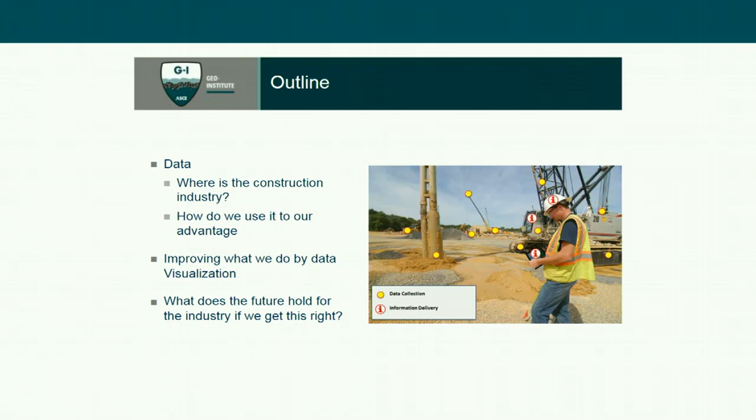What kind of new things are we doing with data visualization? And then, what does it all mean? Hopefully, at the end, if we collect data and use it the right way, what does the future hold for us? Does it help with AI initiatives? Does it help with making better innovations? Certainly we hope it reduces the cost of what we're trying to build, which leads me into the next slide.

If we look at the construction industry as a whole and how it has improved over time, there's some pretty interesting data that McKinsey Global Institute has put together for us. If you don't know who McKinsey is, they're a consulting firm that's been in the news a bit lately, but it's a pretty interesting firm focused on innovation and improving business. Over the course of several years, from the mid-90s until recently, around 2014-2015, they looked at improvement in the construction industry versus total economies from around the world, and certainly compared that to manufacturing.

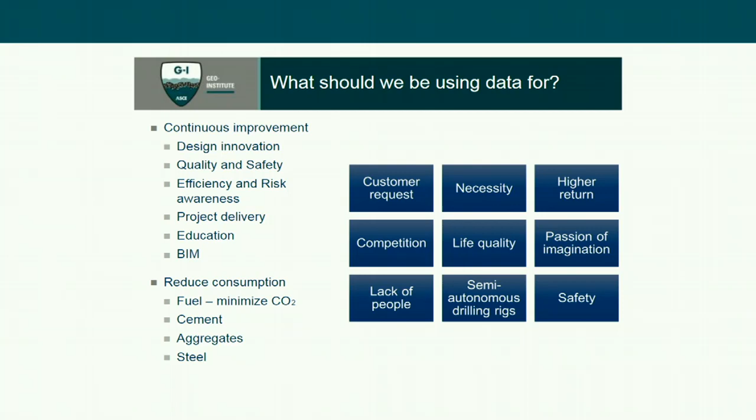Well, what's really driving some of the use of data? It could be customers are requesting it. It's a necessity. We're trying to improve our life quality. There's many different reasons why we could be driving ourselves to use this data in a much different way.

If we think about why we need to collect data and how we collect it, one of the things we do currently is use data from soil borings. That's the first thing we look at from a geotechnical perspective. We go out and take a couple of borings at a site, but we're not able to take borings at enough frequency to really paint a complete picture of the underground risk we're looking at.

So we need to use data coupled with borings to really evaluate and help us understand the assumptions made at the design level. We can use data collection along with some of the borings taken to assess changes in site conditions, allowing us to react faster to these changes. We've got to make sure specifications on our projects allow us to do that. We also use data to look at performance of the design.

So are the measurements we're seeing as we're building, say, a ground improvement solution or support of excavation—do the measurements collected from the systems we have in place really make sense with what our design assumptions were? We can couple those with observations and really make a complete picture of what's going on from a design perspective.

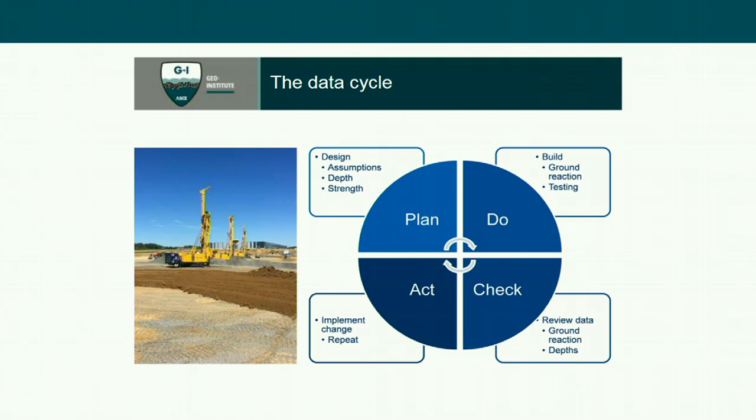That takes us into the next step, which is the Act. The Act phase of the data cycle allows us, after the review of the data has taken place, to implement change moving forward. If we think about our construction sites in this manner, it allows us to move forward with a complete picture of data and how we manage that.

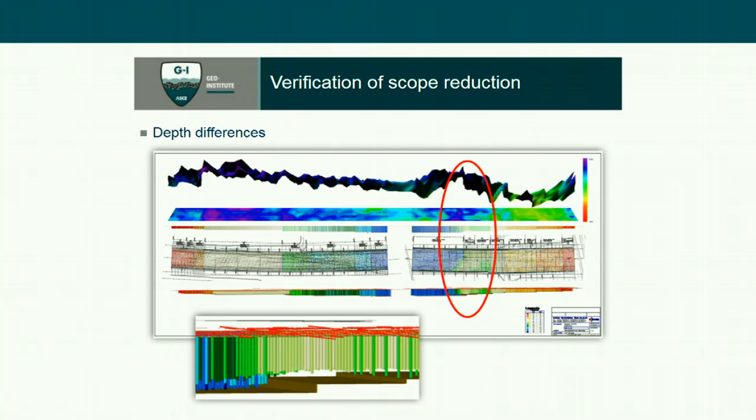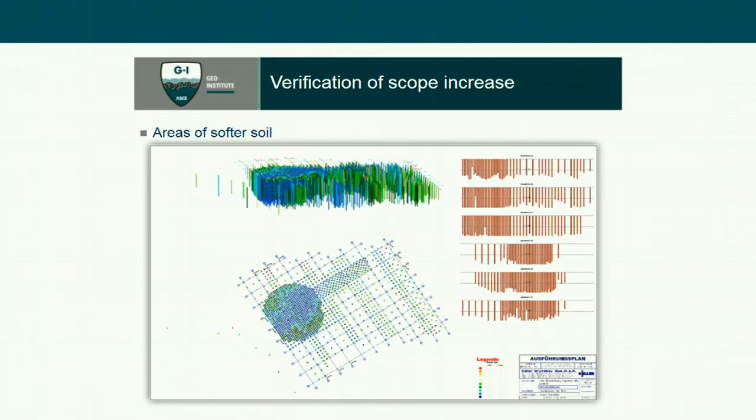Okay, so this is a scope reduction. The next way that data can be used is for verification of scope increase. This is the positive side of what contractors are in the business for, moving ahead that way.

Thank you, Dan. Go ahead. Yeah, I think we're going to leave, maybe come back, see if we can answer some questions later, because I want to make sure that we have enough time for everybody.

So today we'll be talking about ways to mitigate shallow slope stability using plate pile ground improvement systems. And we'll progress through the slides.

When you're an engineer or an asset manager facing a slide repair, that's usually an unexpected cost - something we don't plan for and certainly don't like to deal with. As we consider choices to repair those, they depend on many things: how much it's going to disturb current operations, such as in the case of a highway embankment; what the long-term maintenance looks like; whether we're fixing it for a short period just to restore serviceability, or whether we want a long-term fix we don't have to worry about. Part of that is the design cost, and how much that's going to affect the overall budget for future assets an asset manager might have to deal with.

It's always pretty inexpensive and easy to push the soil back uphill when you experience a shallow slide, and it's usually cheap to do that the first time.

So we'll talk a little this afternoon about SRT systems, or plate pile systems. They can provide engineers with a final or engineered solution, and the design slide shows a couple of small diagrams of how this works. We're basically dividing the failed and sliding soil mass into smaller increments, and designing the plate pile itself to be strong enough to support the movement of that smaller increment as it tries to move downhill.

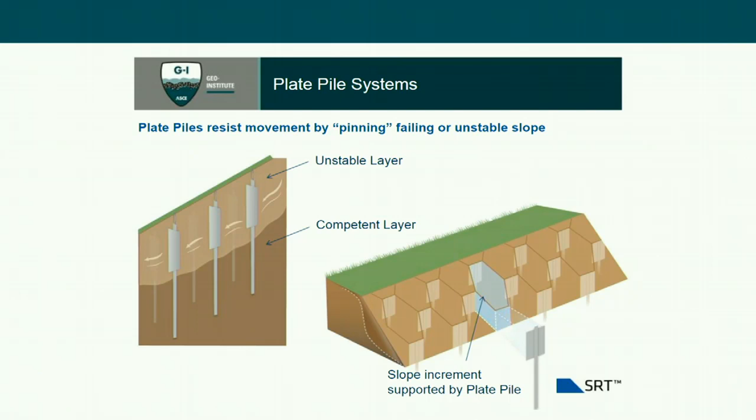And the transverse spacing is usually going to be a function of the analysis. We have some slides later on to get into a little more detail about that.

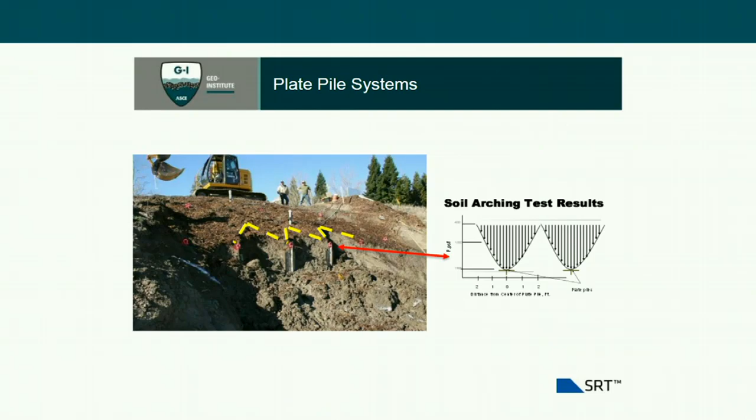Just some pictures of what plate pile looks like. These are typically regular steel, black steel, that can be easily moved with an excavator and one guy on the ground. Not too heavy, and you can see that these are S-shapes generally.

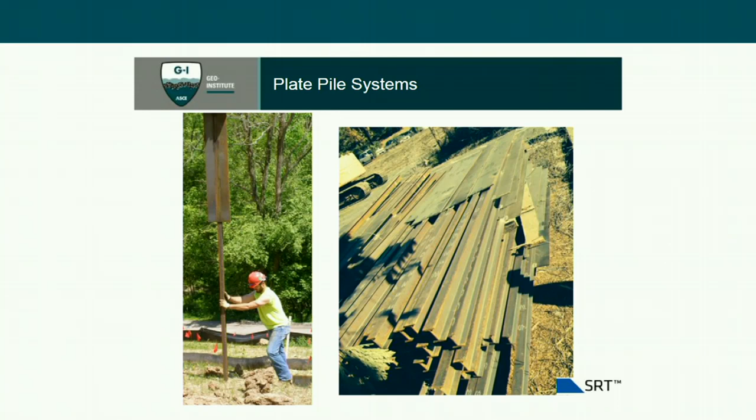Galvanized steel or black steel can be used if you have a highly corrosive situation. You could oversize the steel of the plate piles. It's no problem—usually add an eighth of an inch or so for corrosive steel. Normally that is basically done in accordance with FHWA requirements for steel embedded into soil.

The piles themselves can be S-shapes or they can be angles. The industry has kind of gone more towards using an S-shape. It's easily available and comes in standard sizes. Usually 40-foot lengths of pile can be cut easily into 5, 7, 13, or 10-foot sections.

The S-shapes are pretty usable, and the lengths can vary depending on the design need, anywhere from as shallow as 6 feet to as deep as about 16 feet. It's important to note that the plates themselves are going to be about 12 inches wide, and the lengths of the plates will vary as a function of the failing mass, as the depth of that failing mass.

But the welds that are used to hold them on are not structural, they're not needed to be structural. They're just used to keep that plate on the pile as it's being driven into the ground.

General guidelines for the suitability of plate pile systems or SRT systems: anything from pretty flat to pretty steep. 1-to-1 is about as steep as most applications fall into, and really most applications fall within a 3-to-1 or a 1-to-1 slope. In Texas, there are many slopes much flatter than that still moving quite a bit, so they could be as flat as 7-to-1 or 8-to-1.

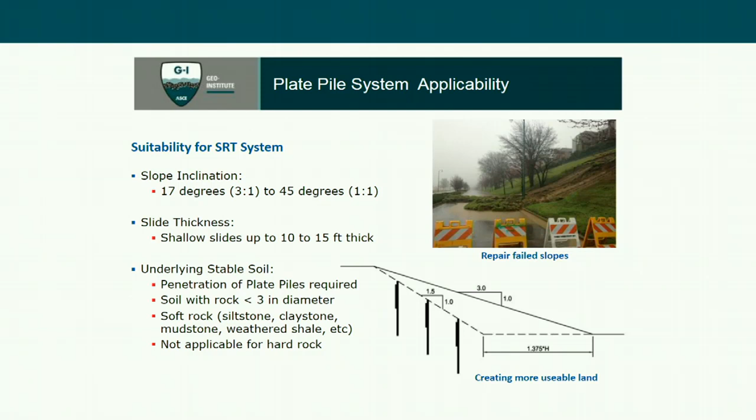Fast using normal excavation equipment—just a normal 315 or 312 size Caterpillar excavator—and they can be installed using either a hydraulic hammer, as shown in this video, or a vibratory hammer, similar to one that might be used to install sheet pile.

There are a couple different ways to deliver plate pile systems to customers, and we'll talk about 2 of them here. One is for pretty basic projects. These can be done directly to the contractor, and they have chart solutions that make things quick to respond to. They can usually be installed by an on-site contractor, or perhaps a DOT or public works maintenance crew. Normally this is an emergency response type application where the slide has occurred as a surprise and it has some impact on part of infrastructure.

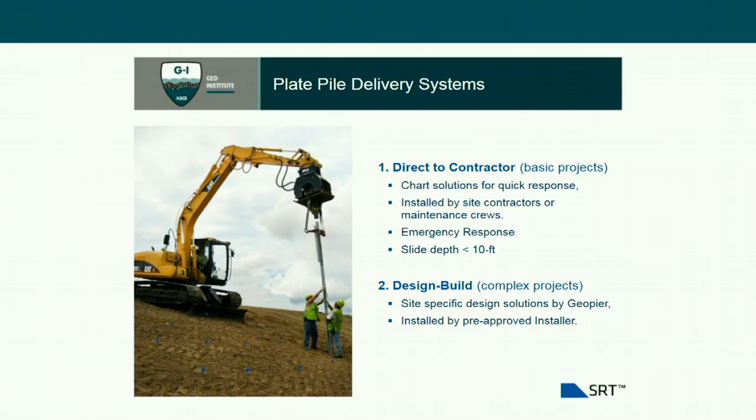Usually you want to deal with shallower slides, about 10 feet or shallower. Then, of course, if there's a more complex slide with a steeper slope perhaps, or more critical infrastructure or property upslope or downslope of it, a site-specific design solution can be provided. This is usually installed in a design-build manner, so you'd want to work with a pre-approved installer who has experience installing plate pile systems on past projects.

Let's talk a little bit about how basic projects can be provided. Detailed engineering analysis are clearly always preferred, but oftentimes these slides are impacting public infrastructure. It might be impacting an industrial asset like a pipeline or transmission line, or it could be putting commercial property in some imminent danger. So you need a quick solution that allows field crews to mobilize and begin repairs of this slide. To accommodate this, plate pile designers can use predetermined solutions based on typical inputs from basic soil mechanics information.

These will provide the designer with predetermined spacings, and they'll be conservative, based on 4 primary inputs: the slope inclination, how steep or flat the slope is; how deep the slide is; what type of soil we're installing in, whether it's soft, firm, or hard; and what the required factor of safety is.

In this manner, normally the designer would need to have project information provided by the customer, the person who has ownership of that slide, and then the designer would turn the solution and specifications back over to that owner to be installed by a contractor of his choosing.

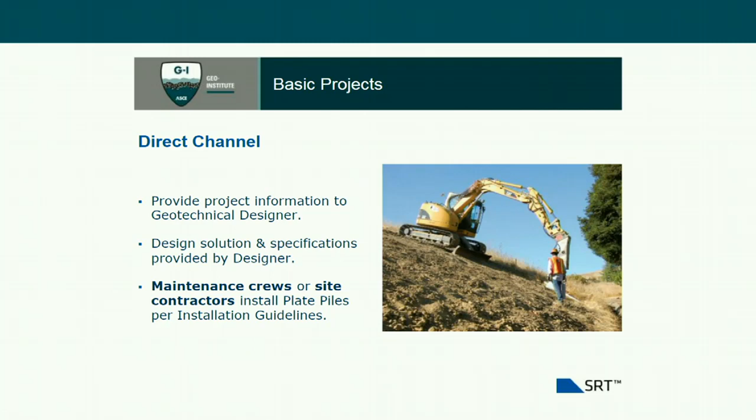For complex projects, more analysis is required, and I'll go over in just a few slides the basics of how the design analysis is undertaken. The first step is, with the knowledge of what we believe the depth of slide is, we can go into an LPILE input by choosing a plate pile length. For this particular example, we chose a 10-foot plate pile just for the purposes of looking at it, with a sliding depth of about 7.5 feet.

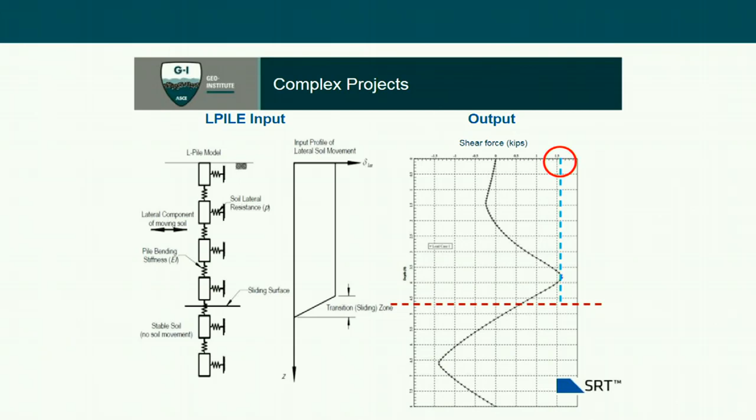So you model that plate pile in a traditional LPILE analysis, and as you're applying load to it, you want to pre-select a deflection of about 1 inch, to see how much stress that plate pile can develop at that lateral deflection. For this example, with that 7.5 foot deep slide and a 10-foot S-shaped pile, we developed a shear resistance of about 1.5 kips.

So we know that for this particular application, the shearing capacity for the plate pile is about 1.5 kips. You go back into your slide analysis program and, using the composite shearing now provided by the plate piles, combine the back-calculated phi and C information from the failed condition, inserting the appropriate number of rows to the appropriate depth in a composite manner to develop the slope stability solution with the proper factor of safety.

The required factor of safety can change—sometimes it's 1.5, it can be as low as 1.2 or 1.3. That dictates the number of rows and how far up and down the slope you have to go. It's common for some of these repairs to provide owners with options of factor of safety to see which one fits their budget better.

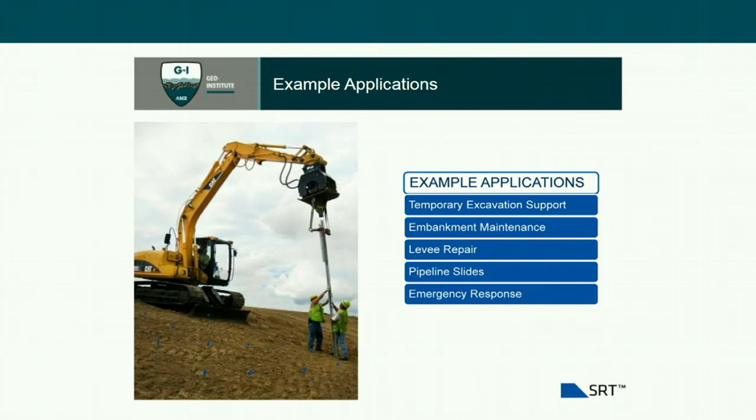This slide shows a bunch of different examples of applications for plate pile use. Due to time restrictions today, we're going to talk about 2. We'll look specifically at embankment maintenance and pipeline slides, although any of those 5 categories would be good applications for plate pile systems.

The failed mass was not impacting traffic, luckily, at this time, but it was feared that further movements would cause that to be a problem.

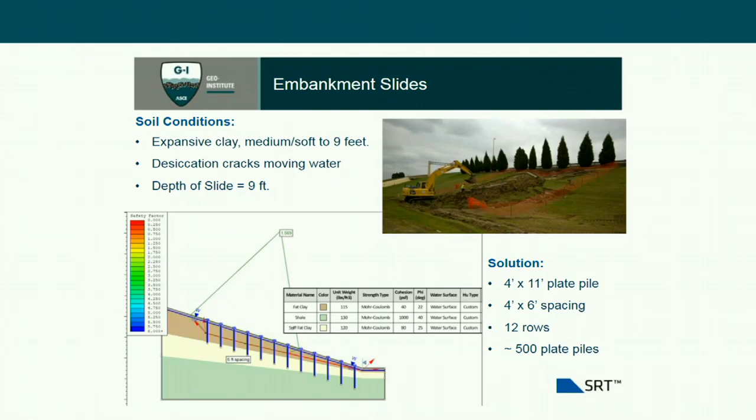The solution developed was plate piles with a 4-foot plate and an 11-foot pile, spaced 4 foot parallel to the slope and 6 foot up and down the slope, needing about 12 rows. About 500 plate piles were installed to repair this slide.

When it was done, it looked nice and natural, as if nothing had ever happened. Those 500 plate piles took about 2 weeks to install with no disruption to traffic. You can see from the pictures they were able to work on the slope.

When they were done, the natural finish chosen was just some sod that was placed down and staked in place after the plate piles were installed as per plan. Because the plate piles are embedded about 12 inches below final grade, there's nothing that would impede a mower or any type of maintenance equipment from doing everything it needed to do before the slide had occurred.

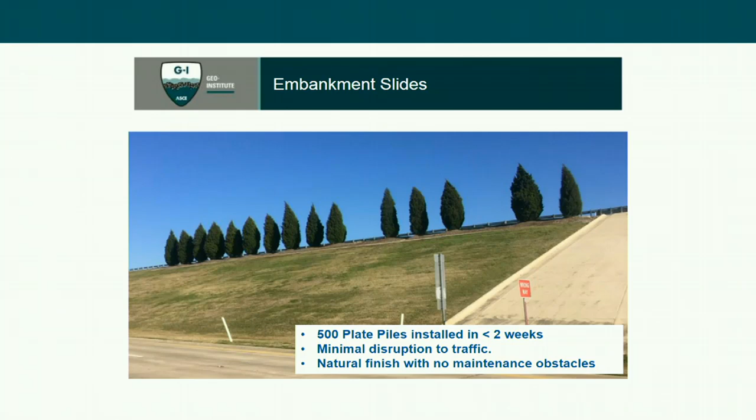Next example we'll look at would be a pipeline slide that happened in northeast Kentucky. If anyone is in that area, you know there's a lot of pipelines in the midstream industry coming through there.

They had to excavate soils around the pipeline, make necessary realignment of the pipe, and then replace the backfill. But due to the emergency response nature of the repair, they had to put that in pretty quick and didn't compact it the way they wanted to, so they needed a final repair.

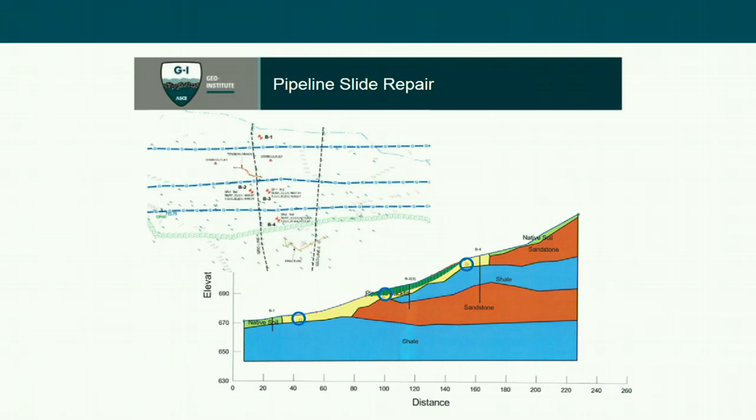So the initial repairs were made, but they needed a final repair so that this wouldn't continue to happen and continue to impact these pipelines.

It was determined that this slide depth repair was to be about 5.5 feet, and due to the length of this repair area downslope, they needed 19 rows. This one was a little more severe.

Even though it was just a 3-to-1 slope, they still needed the plate piles to be installed on 4 to 4.5 foot centers with 10-foot piles and 4-foot long plates.

Overall, there was about 1,500 plate piles required for this project, completed in about 25 days. They got a period of pretty good weather, and because it was a 3-to-1 slope, the installation equipment was able to access this work area with conventional equipment.

Matt, you need to wrap it up. We are running out of time.

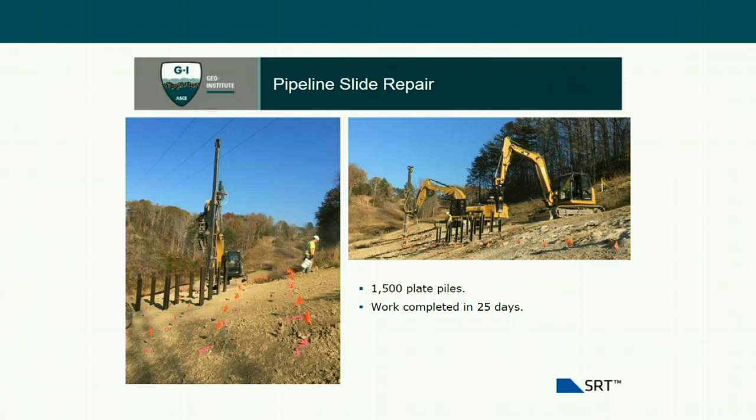Yeah, so with that job went well, a little bit of pre-drilling was required. So right on time, Jose. Just finish with a few

Parting thoughts on plate pile systems: they're fast and economical. They can be used very quickly for emergency repairs due to the simplicity of the design. Most of the pictures did show conventional excavation equipment, things that most public works and DOTs have easy access to. And from an engineering standpoint, they do represent a final and robust repair for recurring slides.

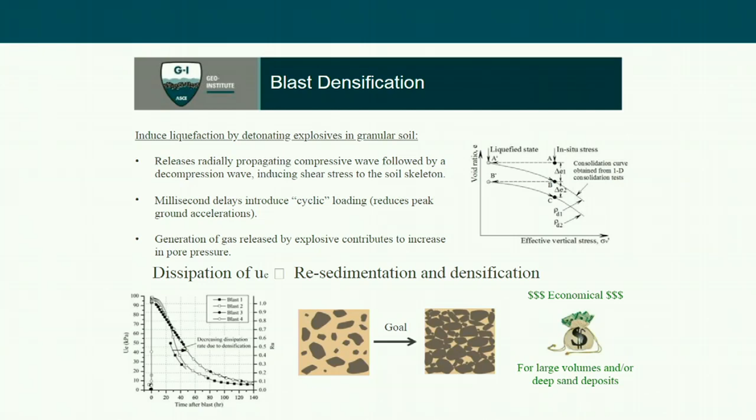How do we verify improvement? The most common method is to survey the area that was treated, and we do this by measuring surface settlements. We note quickly here that this is not a direct measurement of densification necessarily in the target layer, but if we have surface settlement, then we know something is being densified.

We could also attempt to obtain direct measurements of densification through something like Sondex tubes, where we're actually measuring vertical deformations at depth. And then thirdly, the other more common approach to verify ground improvement is to measure some sort of change in penetration resistance, usually with the cone penetration test or standard penetration test. The intuition being that if we've densified the soil, we'll have an increase in penetration resistance.

And while this is sometimes the case, we often observe either no increase in penetration resistance and in some cases a decrease in penetration resistance. In certain cases, this is followed by an increase in penetration resistance with time. And what we're trying to do is really understand or reconcile these observations.

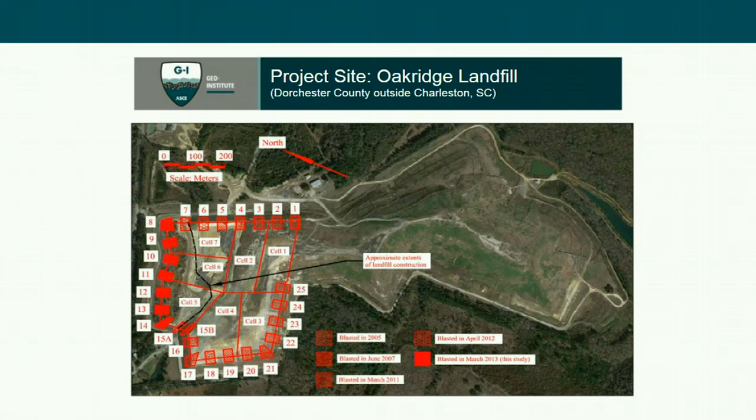There was also a thin layer known as the Pringletown beds of silt overlying that loose layer of black sand. Also note that in this particular case, we had what we call 4 coverage, or 4 blast events, that took place.

What we did as far as instrumentation was survey the area before and after each blast. We performed pre- and post-blast CPTs, and we also measured pore water pressures at 10 different locations, both inside and outside the zone and at several depths.

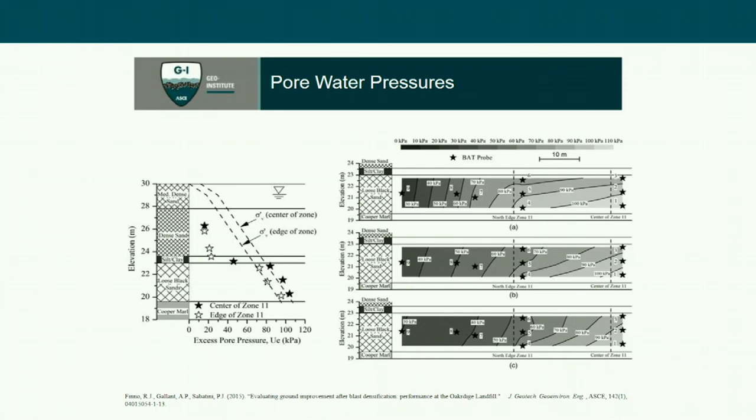One question that might arise is, was the densification occurring within the loose layer itself? Again, we saw that we only liquefied that layer. Secondly, CPT results also show an approximately half-meter drop in these 2 layers, the overlying Waccamaw formation and then the black sand below. That helps verify that densification was only occurring within that black sand, and that corresponds well with the surface settlements we observed as well.

So we're fairly convinced that, yes, densification was happening in that area.

So really what we want to know is, what kind of increase in penetration resistance might we expect? We had an estimation of relative density before the blast, anywhere from say 20 to 30%, and then relative density increasing based on those surface settlements to as much as 80+% at the center of the zone. So we may expect, based on the stress levels at that depth, a tip resistance upwards of 15 to 20 MPa. But as you might expect, given this talk, we did not observe any increase in penetration resistance.

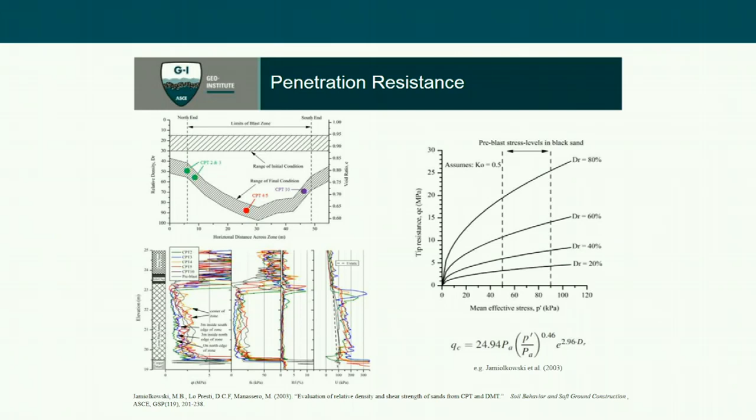Another interesting thing to note here is that we also noticed an increase in the pore water pressures. If you look at the CPT results, I'm showing the pore water pressures measured at the base of the cone, and they actually increased from pre-blast levels. That was an interesting result, and I'll try and get to that here in a second.

So one of the first things we wanted to do was try to explain why we're not getting an increase in penetration resistance, so we looked at the stresses using a finite element analysis.

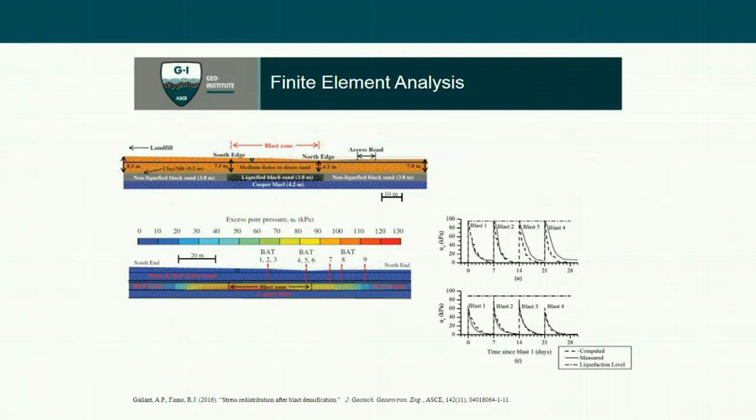Predicting excess pore water pressures generated during a blast in a finite element framework is extremely complex. Fortunately, we had detailed pore water pressure measurements, so we could input these as the driving force as they dissipated. On the right, I'm showing the computed and measured dissipation of excess pore water pressures before and after each blast at a couple of locations.

The second thing we considered was our choice of constitutive model to simulate the soil. We went with the sand hypoplasticity model, a critical state model with barotropy and pycnotropy terms—fancy ways of saying pressure and density dependence, as is the case for soil. We wanted to capture the behavior at several densities, and as shown with these triaxial tests, we show the stress-strain response for relative densities of about 20 to 80%, capturing that behavior reasonably well with this one model.

The second thing we needed to do, a limitation of elastoplastic models, is capture the resedimentation process—in other words, erase the stress history. With the basic sand hypoplasticity model, BSH, we can do this. In the bottom right figure, we wanted to resediment in virgin compression, but outside the zone where we didn't observe settlement and didn't erase the stress history or liquefy it, we wanted to recompress with a denser state, or lower compressibility, using the extended sand hypoplasticity model. That's how we captured both behaviors.

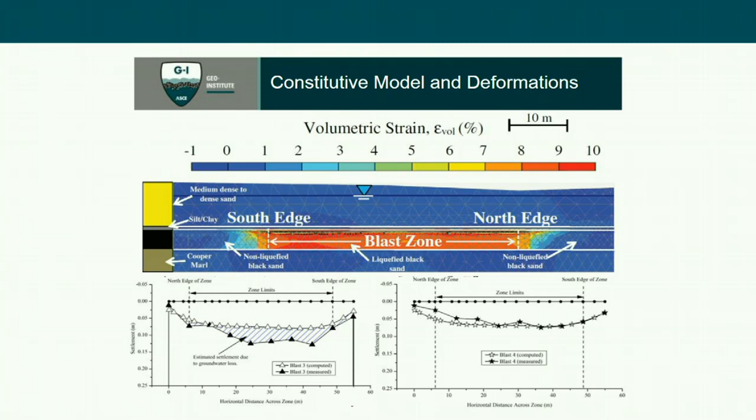So that's where we started to ask ourselves, what's going on with the gas released during detonation of the explosives? One of the instruments we had out there to measure pore water pressures, the BAT probe, acts as both a piezometer and also has the ability to sample pore fluid—I say pore fluid because it samples pore water, but also any potential free gas that may exist.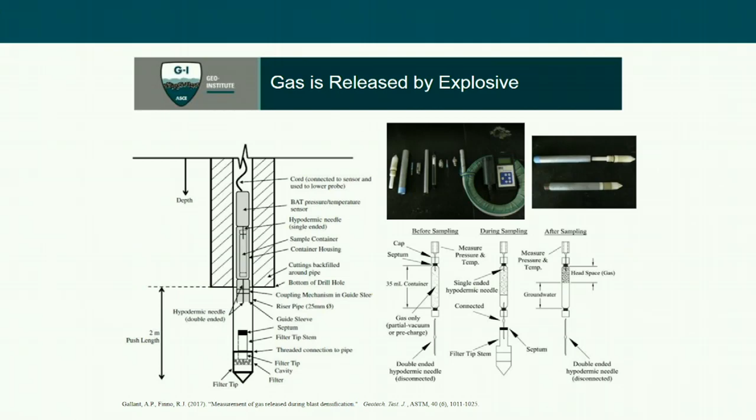I won't go into this in detail, but what we're able to do is capture the pore water, and with the gas in the headspace, quantify the amount of gas that was in situ. That's important for us to understand—we wanted to know if there was any free gas in the soil matrix that may be contributing to the post-blast penetration resistance.

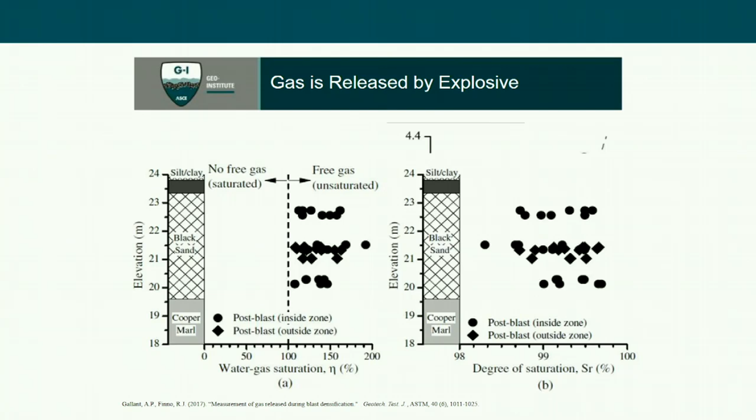On top of that, we wanted to determine, based on the amount of gas we have, whether we saturated the groundwater with gas - in other words, whether we cannot dissolve any more gas, so we'd expect free gas. The answer was yes. On the left here we have water gas saturation, which we call eta, and when that's above 100%, we say we have free gas. Based on the amount of free gas, we're not trying to say we captured all the free gas in the area, since some may have been trapped in the voids, giving degrees of saturation less than 100%, though they may have been lower than what's indicated here.

Let me finish up quickly with a look at the pore water pressures we typically expect around the cone. With coarse sand, we typically do not expect any excess pore water pressure. But in fine sands, we do expect some excess pore water pressure around the tip and then at the shoulder, as we observed in pre-blast as well.

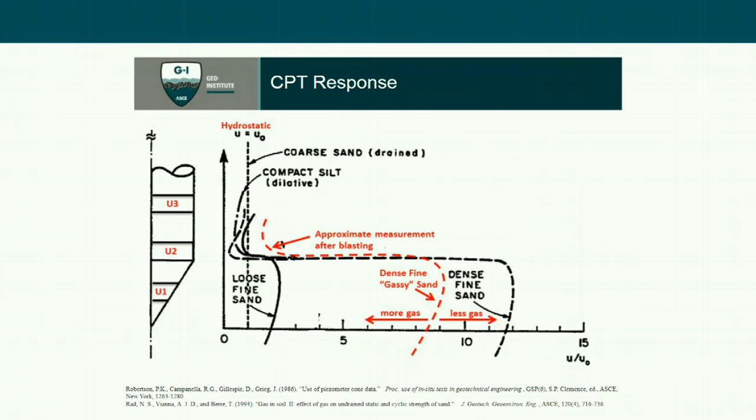When we have gas in the soil, that will increase the compressibility, or decrease the bulk stiffness, of the material ahead of the cone. That increased compressibility could contribute to the decreased penetration resistance we observe after blasting. Additionally, as that cone passes, we induce very large shear strains around the base, and in a dense material we'd expect negative excess pore water pressures. But in a gassy, dense material, you'll lose that negative excess pore water pressure that typically develops. So what I'm showing here is the difference in shear strength between dense saturated sand and dense gassy sand during shear - you get a much lower shear strength because you're not developing those negative excess pore pressures.

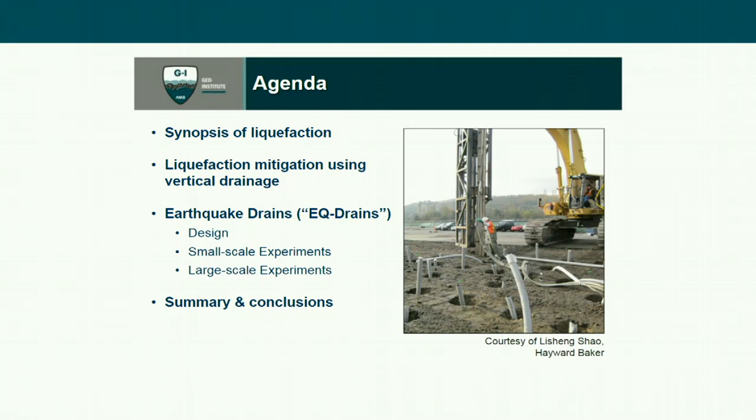Good afternoon all. This afternoon I'm going to focus on soil liquefaction mitigation using earthquake drains. So quickly moving into the presentation - what we'll be covering: a quick overview and synopsis of liquefaction, moving into how to use vertical drainage for mitigation of liquefaction, components, the design, some results from small-scale and large-scale experiments, then wrapping up with a summary and conclusions.

Starting off with liquefaction itself: when we have a loose granular soil and it is sheared either monotonically or dynamically, the soil particles want to rearrange themselves into a denser packing, reducing the overall void space to accommodate that loading. Under saturated, undrained conditions, the soil can't densify itself, but rather pore water pressures are generated in response to that loading. The pore pressures are sustained when the rate of generation is greater than the dissipation - this is where we're really focusing the discussion this afternoon. If the shaking is large enough and long enough, and the soil is loose enough, these excess pore water pressures that are generated may lead to liquefaction itself.

So what is liquefaction, or how does it occur? It occurs in granulated saturated soils when pore water pressures equal the initial vertical effective stress. What we get from that is a significant loss of shear strength and a loss of stiffness, excess deformations, and such.

So, moving on. We do not need full liquefaction to occur before we start to realize a significant loss of shear strength and stiffness. We start to see this when about 50 to 60% of the initial vertical effective stress is generated in that pore water pressure.

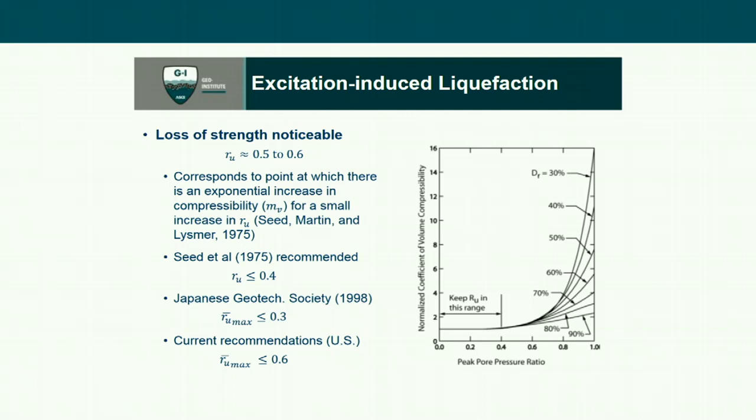So what do we do? We try to limit the amount of pore water pressure generated in the deposit itself. Initially it started with about only 40% pore water pressure generated. The Japanese back in 1998 had reduced it to about 0.3, and now currently here in the U.S. what we're looking at is a maximum average pore water pressure throughout the entire duration of shaking, as well as at any point in the deposit, keeping that to a ratio of less than about 0.6, which keeps us in this low compressibility range of the graph shown on the right-hand side of the slide.

So, what are some of the consequences of liquefaction? They include bearing capacity failure, development of sand boils, permanent vertical and lateral deformations, rotational instability, flow failures, etc.

As we mentioned, we do not need full liquefaction to occur before we start to see a lot of these deformations, considerable ground settlement or deformation to exist or be realized. Stable soils could be potentially weakened as pore water pressures are being dissipated from deeper in the deposit towards the surface in typical natural conditions without any drainage mechanisms in place.

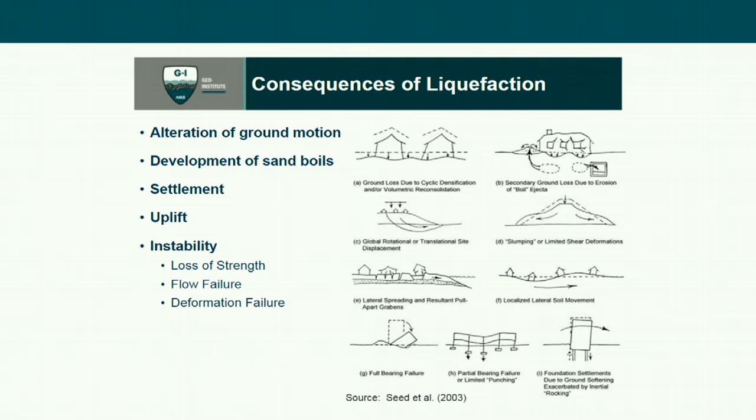Our topic today is providing a drainage mechanism to dissipate the pore water pressure, and lastly, to isolate the potentially liquefiable soils and contain them. So the ultimate goal of all of these techniques is to speed up construction, strengthen the soils, stiffen the soils, reduce permeability, or provide a combination of effects.

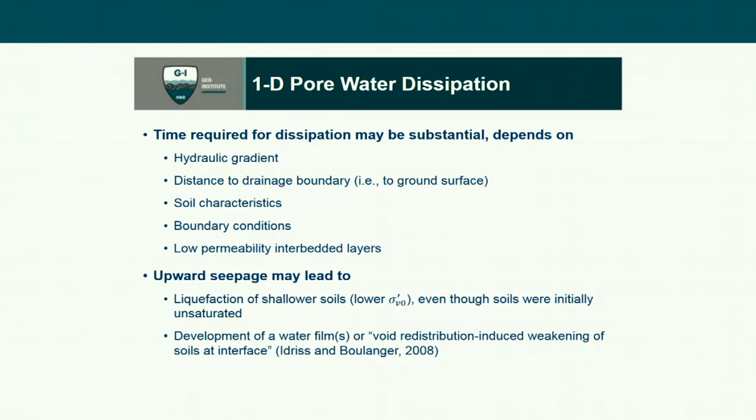The ground surface may be the only drainage boundary. As such, the water flow needs to occur vertically upwards. What we know through nature, especially onshore, is that the subsurface can be quite heterogeneous and layered, meaning interbeddedness of the layering can contain very low permeability soils which impede the flow, now starting to prohibit or prevent that dissipation. The time required for dissipation can be considerably long, depending on the depth or thickness of the deposit, the soil characteristics, and the hydraulic and drainage properties of the soil.

So here's where we start to get into the topic of today: permeability perpendicular to the bedding plane can be considerably lower. Researchers have shown this through numerous testing over the years.

What we're doing is expediting the drainage, shortening the drainage distance instead of going from somewhere in the deposit vertically to the surface. What we're looking to do is put in vertical drains and move the water radially, horizontally through a more permeable layer and get it out, keeping the pore water pressure down and dissipating more quickly. Keeping that dissipation more rapid prevents a maximum buildup of excess pore water pressure and minimizes the length of time at those elevated levels of pore water pressure.

So what we're looking to do is keep the pore water pressure below a prescribed level. This way we can maintain our stiffness, maintain our strength, and reduce the deformations that may ensue.

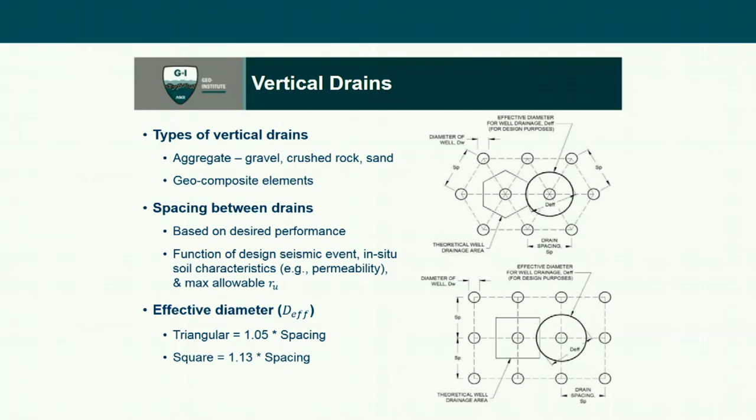Even though the tributary area may form a rectangular or hexagonal shape, as shown on the two graphics on the right-hand side, we idealize this using an equivalent diameter, D-effective, as we saw on the prior screen, and analyze the flow through that idealized volume.

What is an earthquake drain, or prefabricated vertical drain for liquefaction? We have a corrugated plastic pipe, nominal inside diameter ranging from about 3 to 8 inches, with 4 inches typically common here in the U.S. It has slotted perforations along the length of the pipe, and a geotextile filter on the outside encasing the drain to prevent or minimize the flow of soil into the drain, preventing clogging.

The key benefit of using these prefabricated drains is the increased flow capacity within the drain itself. We have high flow capacity, very high vertical hydraulic conductivity within the drain, very little or minimal resistance to flow, and it's quite inexpensive.

How are they installed? Typically, drains are installed 4 to 7 feet center to center between the drains, with a triangular grid typically used. Contractors have reported installation depths of about 60 feet, plus or minus, typically using a vibratory hammer on top of a steel mandrel. A triangular mandrel is shown on the screen, installing these elements into the ground.

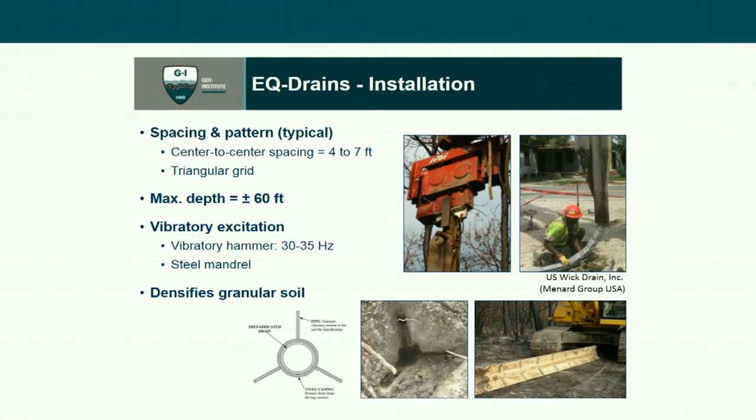The photo on the upper right shows labor installing or pushing the prefabricated vertical drain within the mandrel, getting ready to insert it into the ground. If vibrations are used to install the drain, densification of the granular deposit typically ensues.

So just quickly to go over how the drains themselves are designed: initially, the work performed by both Booker and then Onoue et al. looked at gravel drains. First, Booker's approach had no well resistance—once the water got into the drain, it essentially disappeared, so it was infinitely permeable. Later on, Onoue et al. incorporated well resistance, which decreased the flow capacity of the drain.

The Japanese modified both earlier approaches and cleaned up the design charts that Booker and Onoue et al. had developed. The more common approach we're seeing now is through FEQ drain, a robust finite element modeling program that incorporates flow through the soil, through the orifice of the drain, and within the drain itself. More work is currently being done on more robust, comprehensive finite element programs by Vytiniotis and Whittle at MIT, looking at more complex constitutive soil models and complex geometries and slopes.

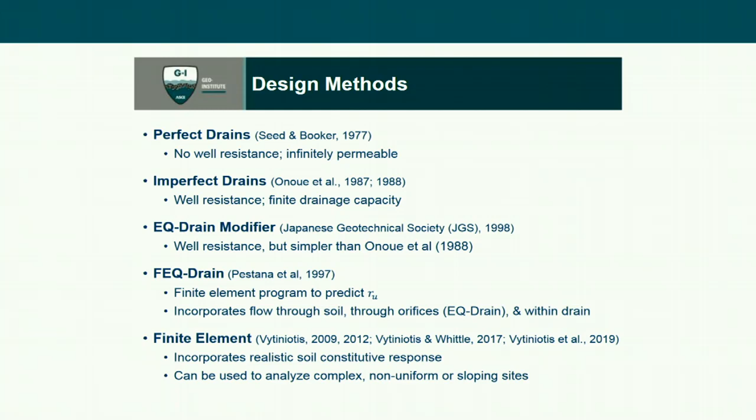So just another overview: with FEQ drain we can model very heterogeneous soils, different boundary conditions, different storage, different hydraulic conductivities—much more robust than the earlier design charts by Booker and Onoue et al.

Okay, so getting now into some of the results from small-scale centrifuge testing performed at UC Davis in California. Three different models were tested.

The first test compared an untreated side versus a drain-treated side. The second test looked at the effects of pinning due to the materials used. The third test looked at untreated deposit versus tubes without perforations for drainage, and drains, all in the same model.

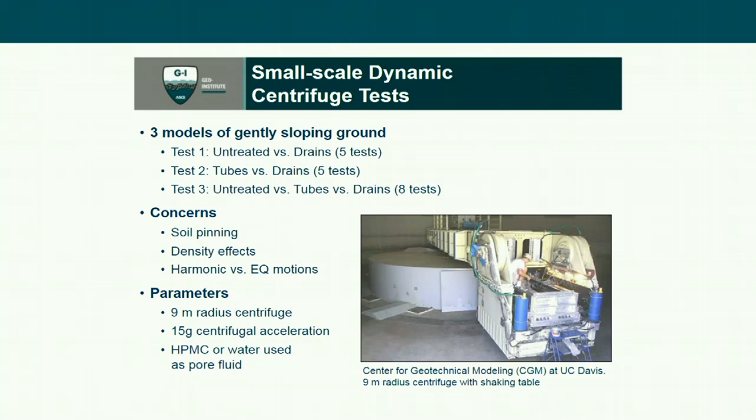Some of the concerns we were looking at were soil pinning, density effects, harmonic versus earthquake type motions, and the responses of the ground or the model, looking at accelerations, pore water pressure generation, and deformations.

Okay, so some of the results. This is the first model, comparing along an idealized center line two sloping geometries coming towards the center. The bottom layer was a dense layer, basically there to help promote saturation of the deposit. A thicker liquefiable layer in the middle, loose sand, and then a crust to slow down the dissipation of pore water during testing.

What was realized during the test was a 20 to 50% reduction in pore water pressure generation, 60 to 70% reduction in vertical settlements, and between 80 and 90+% in horizontal deformation between the drain-treated and untreated side. But the question came out of soil pinning.

So how did it work? What was going on?

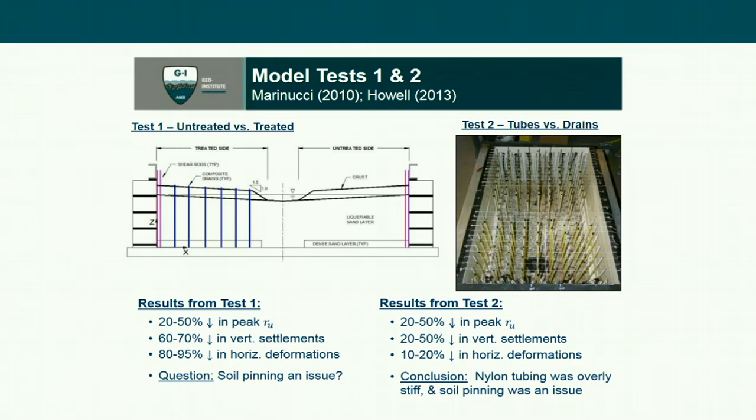If it was slightly overstiff, it definitely contributed to a pinning effect, but did not affect the pore water pressure dissipation. On the left-hand side are the results of the deformation realized in this first test — considerably less vertical and lateral deformations for the 5 sinusoidal motions used, from 0.01g to 0.35g.

Looking at the acceleration, so the base input motion.

On the treated side with the drains, what we saw was the motion was carried up to the surface. Dilatancy spikes were realized. However, we did not see a full loss of input motion as we did on the untreated side, where we hit large pore water pressures but lost complete signal.

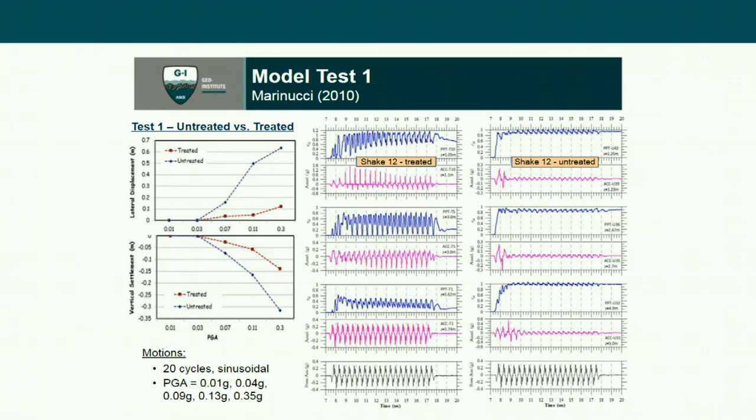Moving on to model test number 3, looking at 3 different sections oriented at 90 degrees. What had been realized was that the drains were flexible, did not impact the response, and were very effective in dissipating pore water pressures.

The input motion and the types of drains were very sensitive to the results obtained, in that the deformations really started increasing considerably once we exceeded a maximum average pore water pressure ratio of about 0.5.

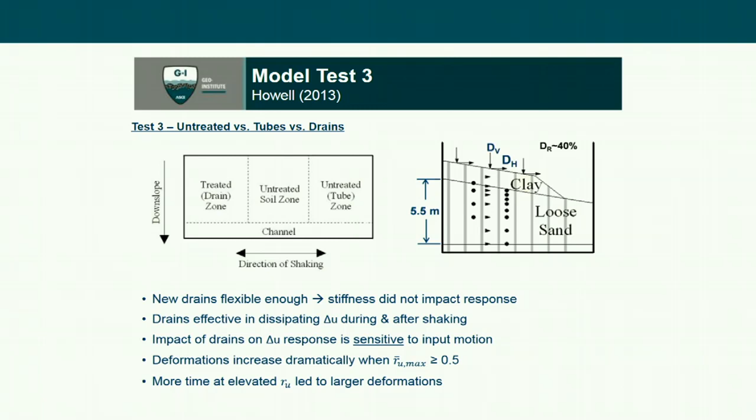Just going very quickly, showing something of interest. Looking at the effect of the drains in the field, we noticed pore water pressure response beneficial during installation of drains from one to another, with communication and dissipation during installation.

We had predominant benefit due to densification of the soil deposit. After a couple of drains were installed, we saw a much better response, a lot of pore water pressure coming out of the ground, dissipation during installation, vertical strains or settlements about in the 5 to 6 inch range, resulting in 1 to 2% vertical settlements.

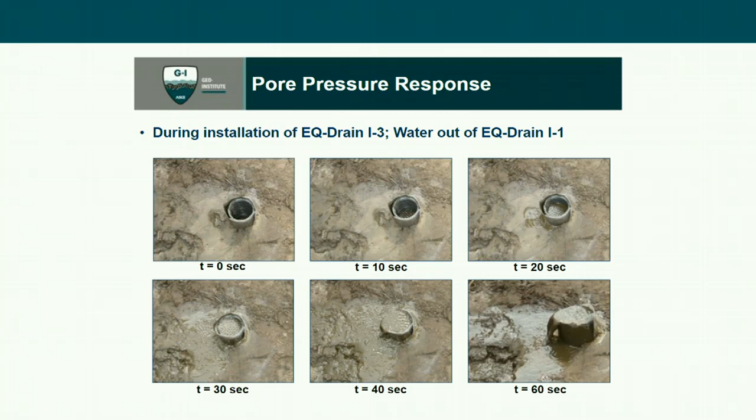So just ending up with some thoughts: vertical drains increased dissipation, which resulted in a decreased maximum buildup of pore water pressure, decreased the potential for strength loss, volume change, and excess deformations, and decreased shear strains, which increased the soil stiffness throughout the entire excitation.

Very inexpensive treatment, about $3 to $5 per linear foot of pipe installed, with additional cost for a vertical surface bedding layer and any surface piping needed.

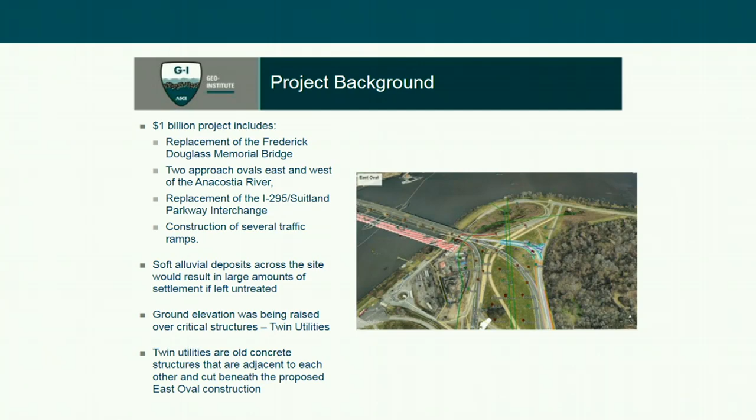The soils at the site include thick deposits of soft alluvial soils that, if left untreated, would have resulted in large settlements because they are raising the grade quite significantly, sometimes up to 20 or 30 feet during construction. One place the ground elevation is being raised is over critical structures they're calling the twin utilities - two side-by-side, unreinforced concrete structures running directly underneath the east oval construction.

Here's what the conditions at the twin utility look like right now. You have the two structures side by side, supported on piles - actually timber piles - extending into a layer of medium dense sand, which is a terrace deposit. Above that sand layer, there is a soft alluvium layer and then a sandy lean clay at the surface.

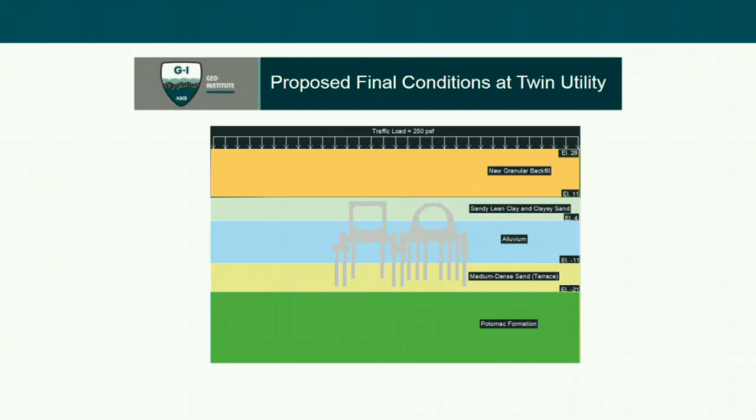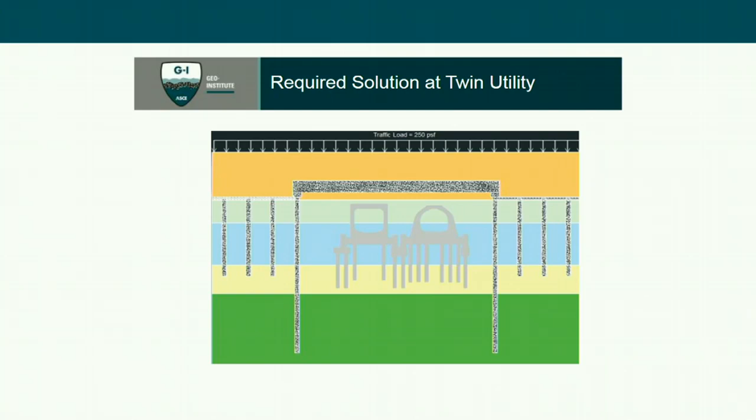What they're planning to do, the final condition is going to look something like this. They're putting somewhere around 17 feet of fill on top of this area, and it will be subjected to traffic loads as well. So the final condition, in order to protect the twin utility from these loads and subsequent settlement, needs to look something like this. The challenge is figuring out exactly how to construct and design that in a way that makes the most sense and is economical.

The embankments adjacent to these twin utilities were being supported with rigid inclusions, but the twin utilities themselves couldn't settle. There was very strict criteria on the amount of settlement they could be subjected to, as well as additional stress. We worked with the owner, but essentially the numbers were zero - they could experience no settlement or additional stress.

Because of the width of the utilities themselves and the clearance we needed to keep from those outermost piles, the actual span ended up being about 62 feet. So you can imagine a traditional reinforced concrete slab really wasn't going to do the job here.

So along with the contractor, the general contractor, and the utility owner, we talked about a number of different solutions, including a bunch of different types of beams to span this area, lightweight fill, geofoam, and combinations of these different solutions.

What we ended up doing was teaming with SAI Consultants from Pittsburgh, which was the structural engineer for this solution. We worked with them along with South Capitol Bridge, the general contractor for the South Capitol Street project, and designed a two-part solution using adjacent box beams and steel beams.

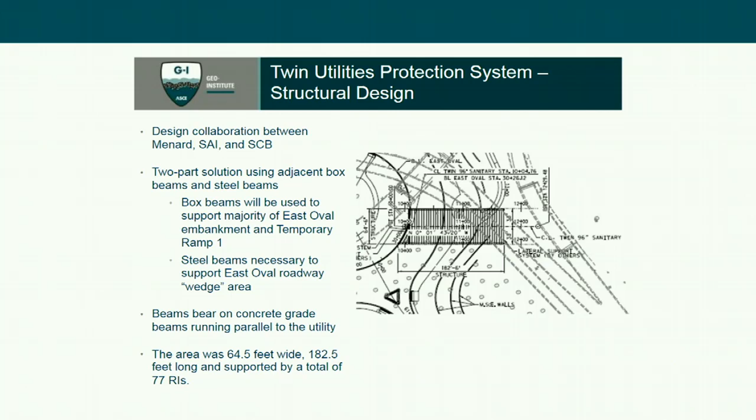The beams that run perpendicular to the utility are sitting on two concrete grade beams running parallel to the utility, and those grade beams are, I believe, 2 feet by 3 feet - fairly small grade beams supporting those box beams. Overall, the area ended up being about 64.5 feet wide and 182 feet long, with a total of 77 rigid inclusions beneath it.

Just a few more structural details: they were 48-inch square pre-stressed concrete box beams. The box beams were doweled into the grade beam below to prevent any lateral movement of the box beams. But the grade beams were not attached to the rigid inclusions in any way - they were just sitting on top of the rigid inclusions.

And I apologize, I noticed this morning that I left CMCs in there. CMCs is Menard's proprietary name for rigid inclusions, but it means the same thing.

So the structural portion of the box beam system was one aspect. The other aspect was designing the rigid inclusion system to provide the support required to meet the project criteria from a settlement standpoint, and also to design the rigid inclusions structurally to take the loads from this large span.

So we created a 3D Plaxis model to evaluate both the settlement of the system and the forces in the rigid inclusions. The main thing we focused on was the differential settlement, and that was really where we tinkered with the design to get it to work best.

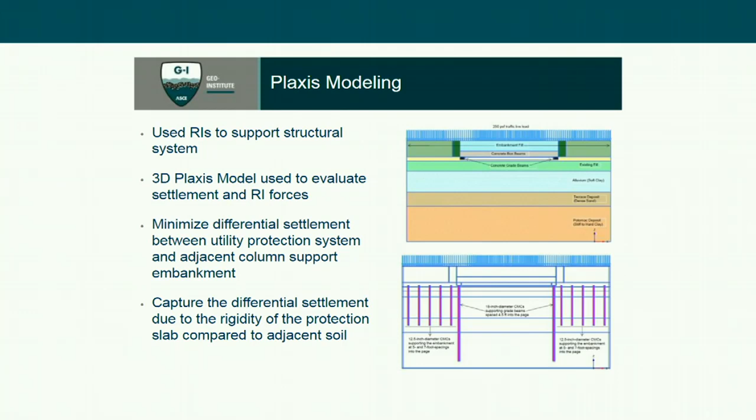As you can imagine, you've got this very stiff system where the utility protection system is, and then on the sides, the rigid inclusions supporting the embankment are going to be providing a much softer response. So what we wanted to do was minimize that differential settlement so that at the ground surface, the response was uniform or nearly uniform.

The results of our Plaxis model here, you can see it on the right. Up above, we were getting about 0.15 inches of settlement at the center of the utility protection system, and that increased to close to an inch, about 0.8 inches or so, out at the edge. The way we did that was by spacing the rigid inclusions out wider and wider as you moved away from the utility protection system.

So the second portion of the geotechnical design was looking at the loads. The loads in the rigid inclusions supporting the embankment range from 50 kips or so to 90 kips. They're pretty reasonable, and those are terminating up in that terrace layer where the timber pile foundations are. But the forces in the CMCs underneath the utility protection system were much, much higher. We're seeing forces of about 290 kips, and these rigid inclusions were spaced about 4.5 feet on center into the page.

When we actually did geotechnical capacity calcs to make sure we were okay at the depths we were anticipating installing them, we were getting factors of safety of about 1. While this was a little concerning, our general experience shows that our load tests will perform better in the type of soil we were in. So we moved forward knowing that if the load test didn't perform as well as expected, we would anticipate drilling deeper.

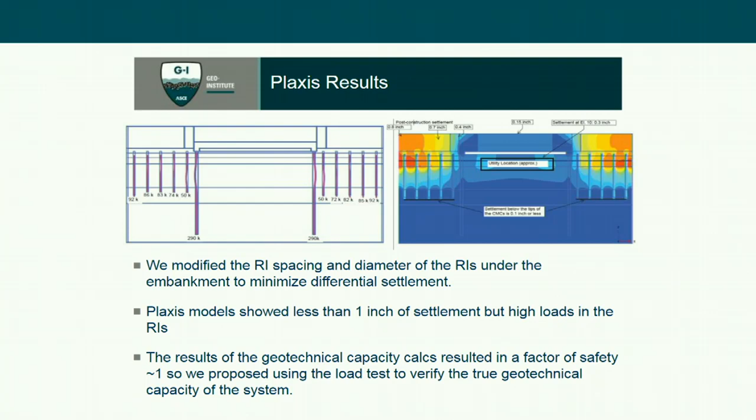So we went into the field to install these. The rigid inclusions under the embankment were unreinforced 12.5-inch diameter elements, while the rigid inclusions under the utility were 18 inches in diameter and reinforced with a central reinforcing bar. The exact location and condition of the top of the rigid inclusion were critical here because that grade beam was going to be sitting directly on top of our elements. It needed to be a flat, smooth surface, and in order to not impact the design of the grade beam itself structurally, the rigid inclusions needed to be exactly where we anticipated them to be.

Our field team did a fantastic job, taking a lot of extra precaution to make sure these elements were exactly where they needed to be. You can see those steel cans they used to put around every CMC so they knew where they were drilling the elements. The utility owner was very involved during installation of the elements. They were performing monitoring, and we were communicating with them daily to make sure everybody was comfortable with how things were progressing.

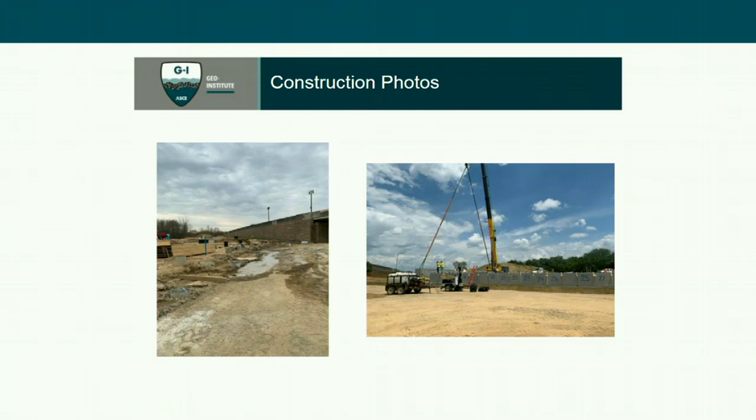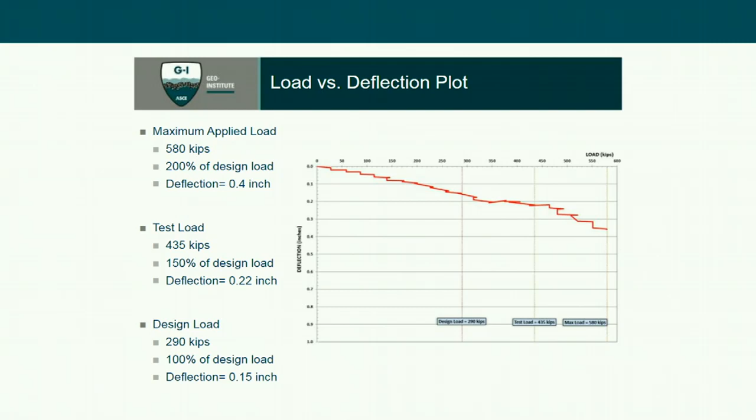Here is the result of the load test we performed. This was on an 18-inch element installed into the Potomac layer. We were able to apply a maximum of 580 kips, which was 200% of the design load, and at that load we saw 0.4 inches of movement. We stopped the test at that load because we had reached the capacity of the frame, not because of the geotechnical capacity of the element. At the design load of 290 kips, we were seeing about 0.15-inch movement.

We were pretty happy with those results, and we actually were able to get some good geotechnical data about all of the soil layers from this test and some other load tests performed at the site. We put strain gauges in the element at 6 different locations, strategically placed around changes in the soil layers so that we could evaluate the frictional capacity of the different soil layers and bearing capacity.

We used those throughout the project when elements came into question, or to optimize the depth in certain areas. We did this for a few different load tests, and we found that the frictional capacities matched up very well from test to test across the site.

So to summarize what we learned from this and how we moved forward using the results of the load test, we had designed for a rigid inclusion length of about 58 feet at the twin utilities, and we moved forward using that same length after the test as well. The load test did perform better than we had estimated for the hand calculations, so we moved forward feeling pretty comfortable, even though these loads were much higher than what we typically use for rigid inclusions.

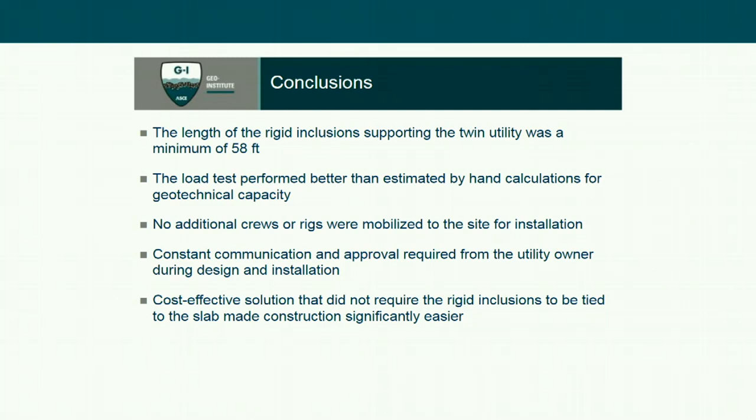So the next and last speaker is Dr. Leon van Paassen, and he'll be talking to us about field trials on microbially induced desaturation and precipitation for liquefaction mitigation. A brief introduction: Dr. van Paassen received a master's degree in applied earth sciences from Delft University of Technology in the Netherlands, and later obtained his doctorate in applied sciences at the Department of Biotechnology, also at Delft University of Technology. He's currently an associate professor at Arizona State University, and a senior investigator at the National Science Foundation Engineering Research Center for Biomediated and Bio-Inspired Geotechnics. Dr. van Paassen, you have the floor.

Thank you, Jose. Let me see if I can upload my slide deck. Just select here. No, just click it, right? How do I upload the slide deck again? Just click on your slide deck. All right, here we go. Here we go. Okay. Yes.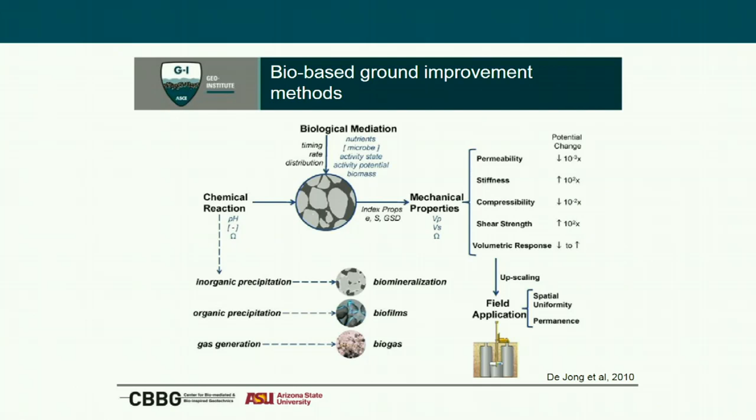Last year I gave a lecture here on using microbes to stimulate carbonate precipitation in order to cement the soil and increase the shear strength, stiffness, or dilatancy. But this year I'll talk about another process in which we use denitrification, the reduction of nitrate, to desaturate the soil with nitrogen gas and also precipitate calcium carbonate in the meantime.

So how does this process work? The process of denitrification: you need substrates which contain calcium, nitrate, and acetate, or another organic carbon source. If you pump them into the ground in a soluble state, the bacteria already present in the ground use those substrates to grow, to create more biomass, to precipitate minerals, or to generate biogenic gas.

As mentioned, if you form minerals between existing grains, you may increase strength, stiffness, density, and dilatancy, or reduce porosity and permeability. The biomass itself isn't really having a lot of effect on strength and stiffness, but it does reduce porosity and permeability, whereas the nitrogen gas would reduce saturation. But if you reduce saturation, we can also increase cyclic shear resistance, though we also reduce permeability.

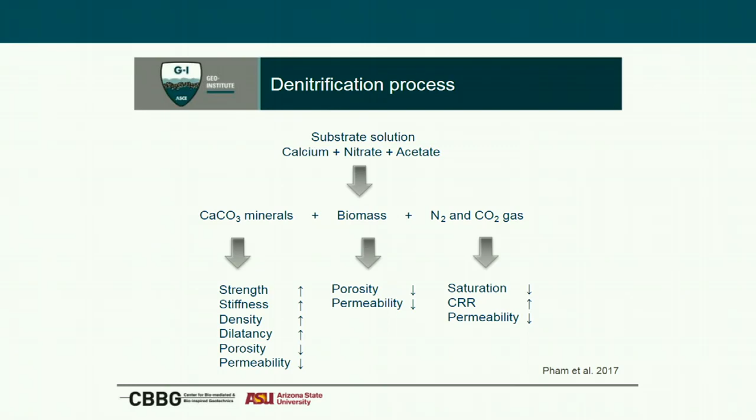So these processes have been developed in the lab for the last 10 years, but in the last 2 years we were able to go outside and found some project locations, contractors, and clients to work with us.

In 2018, the summer of 2018, we did a field trial in Toronto in the Ontario area, where we tried to stimulate denitrifying bacteria in the subsurface to do a ground improvement.

Here you can see the well design. In Toronto, we used 6 injection wells surrounding a single extraction well in the center, and we did 3 plots. In each plot we varied the amount of substrates we injected, trying to cement the soil or treat it and generate biogas.

We tried to close the water balance, so we just extract water to prepare solutions and then pump them back in again. We did this using 12 weeks of continuous injection of the substrate solutions. In total, we injected about 80 cubic meters of substrates into the ground over 3 months, so it's a relatively low flow rate.

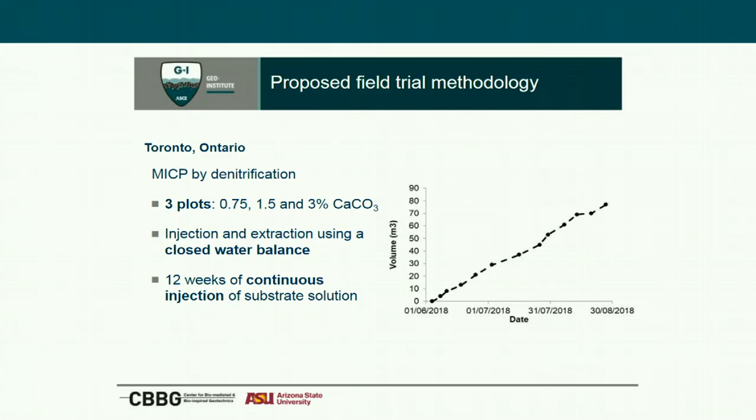One reason for that was that the soil was actually quite silty, so the permeability was already pretty low, meaning we could not apply very high flow rates.

Once we injected everything, we did some test trenches. Within the trenches we excavated, we found that in the treated area, the trench was pretty stable, whereas in the adjacent untreated area, the soil profile typically collapsed. However, this isn't really direct evidence that what we treated was responsible for the more stable surface - it could also be capillary pressures or other things keeping the trench upright.

Another means of testing what really happened was looking at the sensors we hung in the extraction wells. They were fully covered by calcium carbonate, indicating that precipitation did take place. We also took samples and tested for calcium carbonate.

While injecting, we also did some measurements. We placed sensors at different depths in the ground, able to measure the volumetric water content, which is a proxy for saturation, and also salinity, which is a proxy for the amount of soluble substrates still in the subsurface. If those substrates are consumed, the salinity would go down to zero.

What you can see in this plot is the measured volumetric water content. Typically, if you look at the yellow and blue lines, it is gradually reducing over time, indicating desaturation. The orange and gray lines show spikes of increasing volumetric water content. We still don't have a clear clue what happened, but we have some indication that we caused some hydrofracking here.

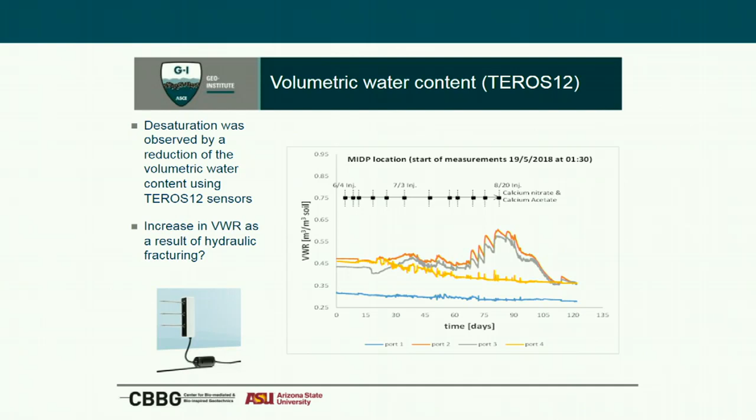Because the volumetric water content is a complex parameter combining desaturation and porosity, we expect that here we fracked the soil a little bit, resulting in an increase in porosity and also an increase in saturation.

Next is the monitoring results. When we did CPTs in the area, both before and after treatment, it was actually very hard to see whether there was any treatment effect.

What you can also notice in these profiles is that the treated zones typically contain a lot of clay and silty sands and sandy clays, which have pretty low permeability, so it's very hard to inject anything there. Most likely, most of the injected substrates, injected between depths of 1 and 5 meters, mostly flushed through the actual upper sand layers.

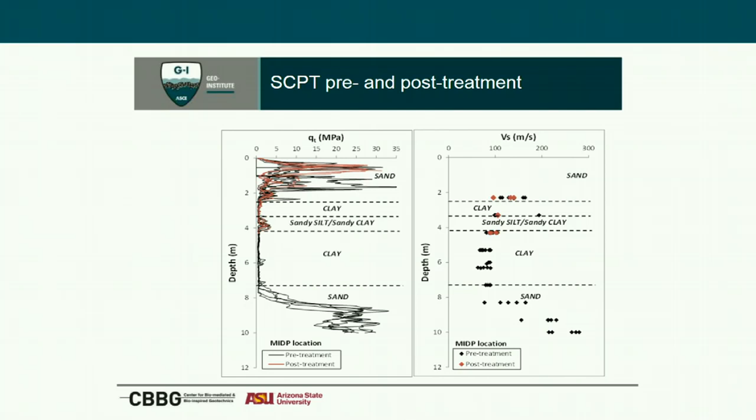So seeing this concept of reduced P-wave velocity, we considered maybe the cementation didn't work that well, but the desaturation probably does work. Moving forward, we considered that you can actually increase the cyclic shear resistance by cementing the soil and increasing the stiffness.

If you desaturate the soil, the presence of the gas phase is also preventing pore pressure buildup from occurring. Comparing the two outcomes: for cementation, we originally considered that to stimulate sufficient strengthening we should precipitate about 1 to 3% of calcite. To produce that, we needed about 25 to 70 kilograms of substrate per cubic meter of treated soil, and to inject this in the ground, we probably need to flush the soil 3 to 10 times with the total pore volume to get this 1 to 3% calcium carbonate cementation using the denitrification process.

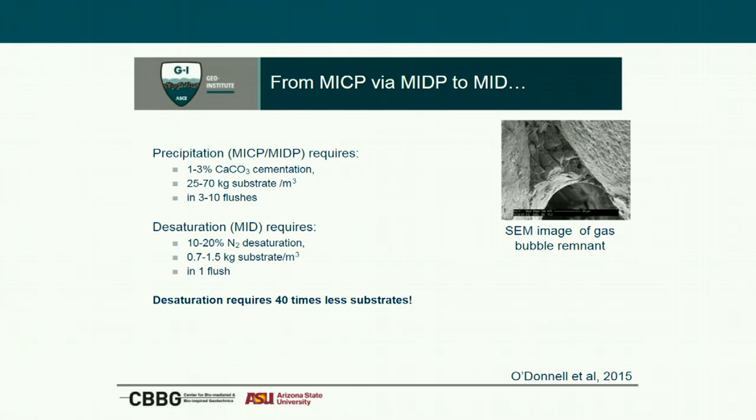Then we considered if we are able to desaturate, and particularly if we have a sandy soil which is relatively permeable, we can inject our substrates over larger distances and thereby also treat underneath existing structures. Having this in mind, we found two locations with a lot of collaborators here where you could try the concept of desaturation.

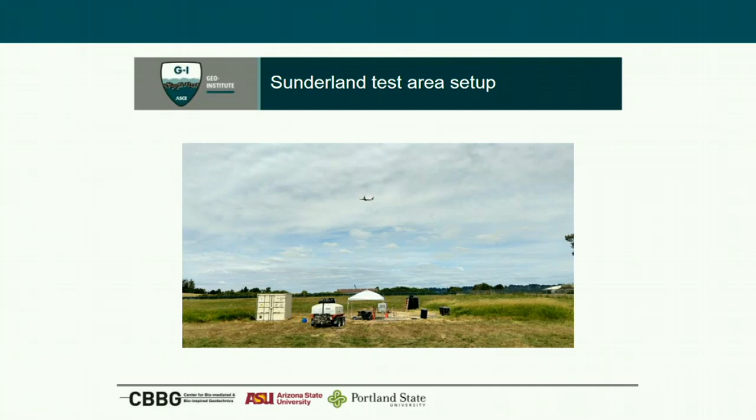So for this location, the actual site looks a bit like this. Here you can see the Sunderland site, which is very close to Portland International Airport, which is also placed on liquefiable soils. Here you see the total setup for a single field trial, where this is our office, and here you see some vessels where we prepare our substrate solutions.

Once we prepare the substrate solutions, we can inject them in the ground, and for this particular application, we turned the direction of flow around. So we injected from the center and extracted water from the surrounding wells. If you would extrapolate this to an actual application, you may change the well configuration or do a more linear type of injection.

In order to see what would happen in this case, we installed several monitoring instruments. We installed volumetric water content and salinity sensors downhole, and we also installed some crosshole sensors to do crosshole seismics in the same area. We also mobilized, using a rapid grant from NSF, the big shaker from UT Austin to do shallow liquefaction analysis.

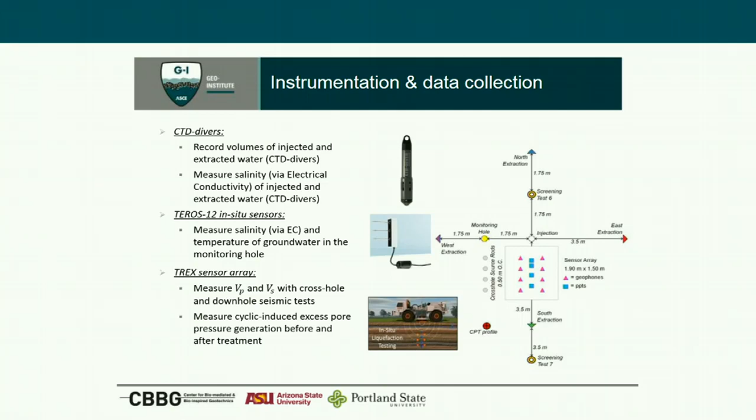So we had TEROS 12 sensors, we had those VP, VS crosshole measurements, we did shaking analysis, and then we used some CTD divers to measure the salinity and volume of extracted liquid in the well. In terms of extracted liquids, it took about one month, maybe 5 to 6 weeks, to inject a total of - in this case it's in gallons - about 60% of the originally intended pore fluid.

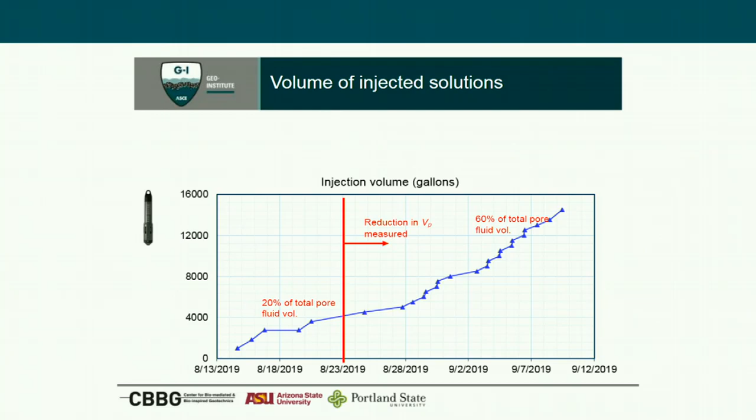After a week or two, we found that in the same area the saturation was reducing, which we could indicate by a decrease in P-wave velocity. We then reached a very low pressure wave velocity in that area after 2 weeks, and this indicates there is sufficient desaturation, at least 5 to 10% desaturation, in the same area.

At the same time, we didn't see any significant change in shear wave velocity, so it's the effect of MIDP in this case, or microbially induced desaturation and precipitation, mostly focusing on the desaturation part.

Looking at some TEROS 12 sensors, we could try to find an idea about the saturation. We installed several sensors at different depths, and we could monitor that the saturation actually reduced to about 92 to 90%, while at the same time you see a spike in salinity indicating there may be some shallow hydraulic fracturing occurring in the area, but you see in general an increase in salinity indicating that substrates are being distributed throughout the treated area.

This is all pretty preliminary information because the Portland field trial was performed just last summer. We're still interpreting the information which we're gathering at the moment.

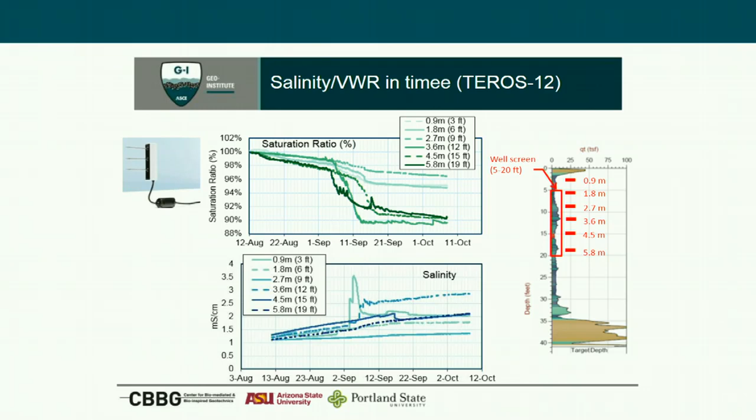We're also continuing to monitor what happens with the desaturation, because if I conclude here, I would say yes, we were able to inject substrates over a large distance. We can inject it, depending obviously on the permeability of the soil, up to a distance over 3.5 meters from an injection well.

Desaturation is significantly cheaper than precipitation. We are able to monitor the results through downhole salinity sensors or doing P-wave analysis.

Second, originally we targeted to desaturate sandy soils, but in this case we had silty soils. The P-wave velocity and also the volumetric water content results showed that we are also able to desaturate relatively fine-grained materials.

One thing to consider is that when you're injecting in a heterogeneous soil, the liquids will go through the more permeable layers, so you get some preferential path between the injection and extraction wells, and you're probably treating the most permeable layers first.

You could argue that after some time, once the gas fills up the more permeable zones, the liquid is forced to go through the lesser permeable zones, and still you get some substrates at the lower permeability locations. But as a result of this heterogeneous soil profile, your gas distribution will also be heterogeneous within the soil.

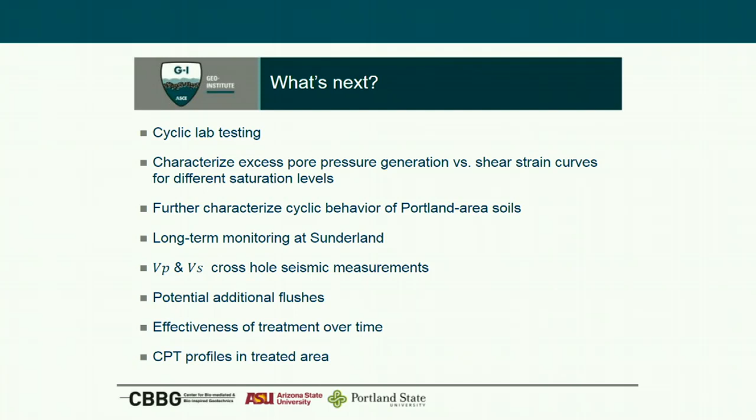We also just did, though we don't have the results yet, CPT profiles of the treated area at the Portland location. And if I listened very carefully to the talk from Aaron, there are means to interpret those CPT results to assess whether there's gas present or not.

With that, I would like to conclude, and I also want to thank all my collaborators in both projects. I'm open for questions.

Thank you, Dr. Van Paassen. We have about 5 minutes left. I think we can go back and look at the questions and see how we do that. Nadia, I need help here. I thought the questions would be here. So is Nadia and Christina still on the line, or?

Answer questions—Nadia is not with us. Yeah, I'm not finding any. I'm clicking on the Q&A and I'm not finding any. Okay, let me refresh. I don't see any questions there. I don't see anything there either.